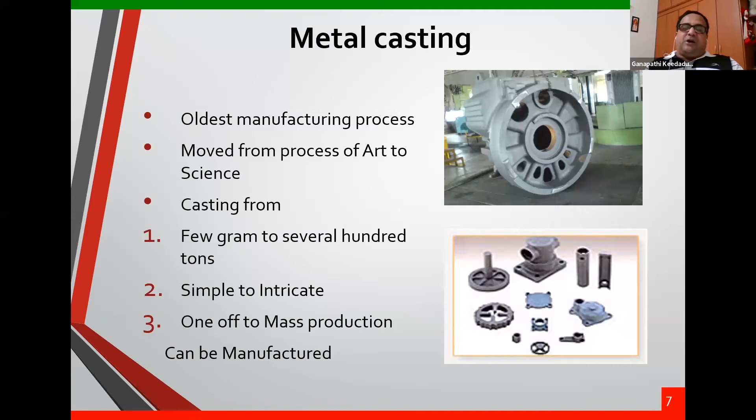If it is a too complex shape, I don't have an alternative. If it is one-off numbers, or mass production at the lowest possible cost, we don't have an option. Hence, people prefer to go to the metal casting processes. I have just demonstrated here; I have used some of the information in the articles.

Look at this. This is one of the front cradle structures. I hope you understand what a front cradle structure is in an automotive, where all our engines are kept in the vehicle. If you open the bonnet, all the engines and so many things are kept on some structure. The structure is called the front cradle structure.

In 1950, this front cradle structure was done with steel sheets. We can see the first figure here. It is a steel sheet construction. It had 46 parts and the weight was 28 kgs. This was in 1950. Come to 2010, people started using aluminium castings in many cases. That is 6 parts, with a 16 kg aluminium casting.

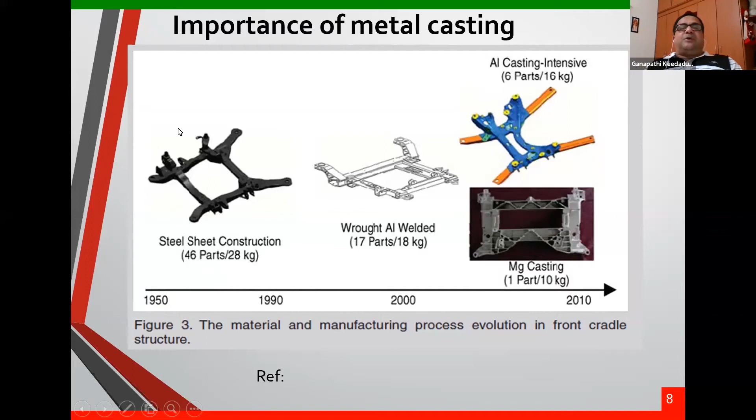Recently in a few car categories, they started using magnesium castings also, because of the density advantages. See that from metal forming, they moved to the casting process now.

Another one is the instrument panel. Inside the car, there are many instruments, and there is a panel to keep all those, the instrument panel beam. In 1950, it was welded steel sheets. Today, people are moving to the magnesium tubular casting. They are going to the casting route. These things show the importance of the metal casting process.

There is a new alloy because magnesium casting is easier. Hence, people are going for the casting process. Many advantages. Look at this. It was 30 parts in 1950. It has become 1 part. Part consolidation has taken place here. And the weight was 12 kg. Now it has become 4 kg. Weight reduction has taken place, and part consolidation has taken place. That's what the casting process has given today to the automotive industries.

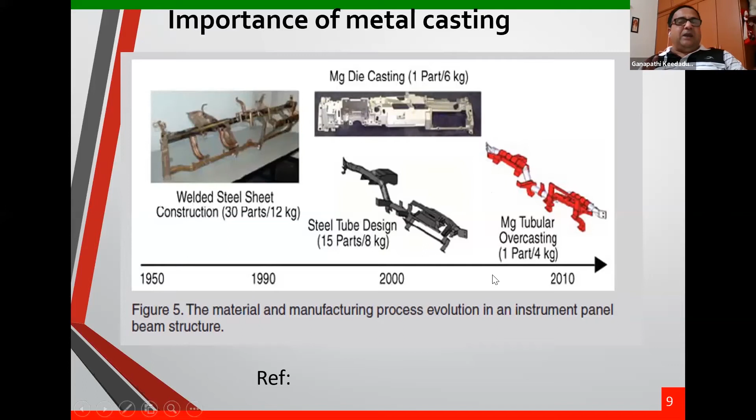Hence, it is very important to understand metal castings and what the future of metal castings is. With this brief introduction, I assume you know the basic metal casting process, so I'll quickly run through this process one by one. The first important one for the metal casting process is the pattern and the core box.

The pattern is always called the heart of a foundry, because how well the pattern is designed and manufactured determines the level of problems in the foundry. If the pattern is good and well designed, we'll have the least problems in the foundry. That means the problems faced in foundries are contributed to the maximum extent by how the pattern is designed and how it is manufactured.

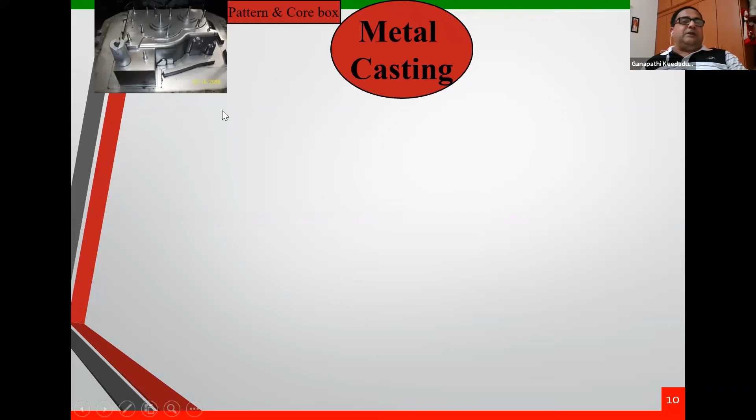Hence, it is very important to design the right pattern, correct patterns with the correct parting lines and all those things, and manufacture it too. The finish, the way of manufacturing, and all the other features we are giving play a very important role in the pattern. Hence, the pattern is one of the important things for the foundry.

The first thing is, if it is a sand casting, we require a pattern. A pattern can be 1-part, 2-part, 3-part or 4-part. In the maximum percentage, 2-part patterns are used. You can see here the pattern is fixed on the match plate. If mass production needs to be done, it is always better to fix it on a match plate, because you'll get consistency, since the two parts need to be assembled.

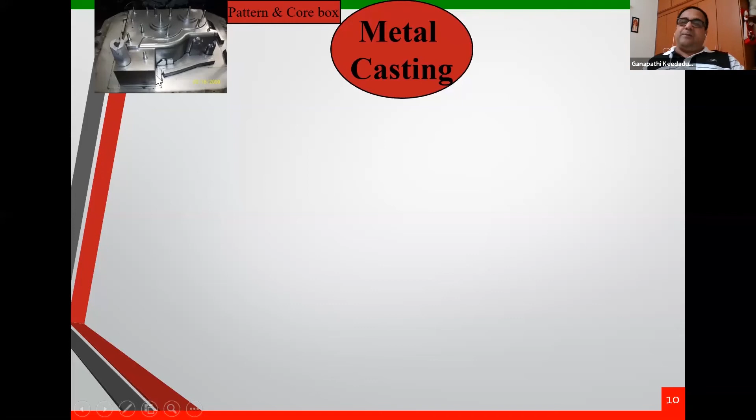If it is a loose piece, assembly may become a problem, and mold-to-mold assembly can become a problem. All those things can be completely avoided by fixing it on a match plate. In any mass production, automated foundry, patterns will always be fixed on the match plate with all the gating and risering system. That comes directly to the mold making shop. Let us go into the details, one or two slides about the pattern and the core box.

In a sand casting process, another important one is the sand mixing operation. When I say sand mixing, we know that we use silica sand. Directly, I can't use the silica sand to make the molds because it has to bind. Strength should be there in the mold, or it should become hard. It should retain the shape when you form a mold.

Hence, we need to mix the sand with the binders, right? That mixing is very, very important. Sand and binders need to be mixed before that sand comes to the mold making process. Today, we know that these are seen in foundries. In a laboratory or small scale foundries, people use the muller to do that.

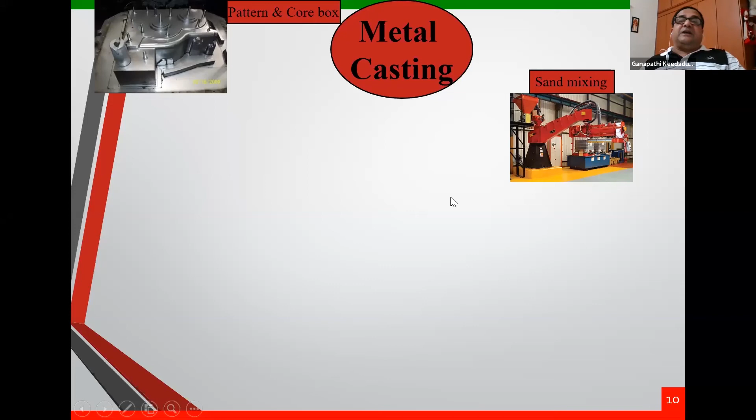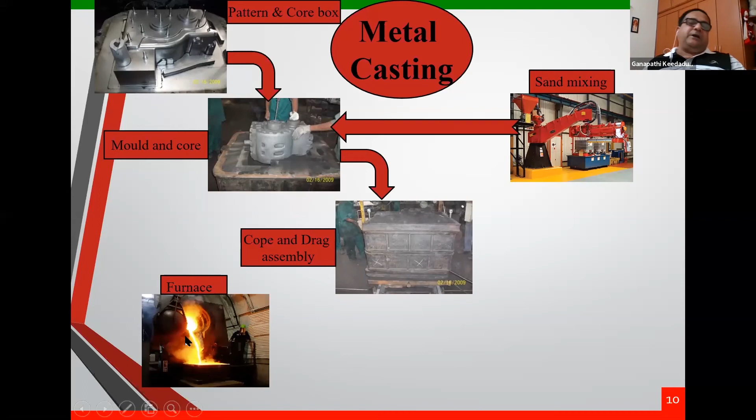What is the next process? The melting. We need to melt the metal in the furnaces. Generally, induction furnaces are used in foundries today. Electrical induction furnaces are used because of a lot of advantages. The metal is melted, taken in the ladle and poured into the molds. This is the general process of any foundry. If it is a sand casting, it goes exactly like this.

If it is a die casting, a pattern is not required because the molds are already made in the die. Only keep the core inside the mold, assemble the two halves of the die and pour it. That means these two halves, which we prepared now in sand, are already available in metal. Keep the core inside, assemble the mold, melt the liquid metal and pour it. This sand mixing and pattern business is not there in die casting processes. That's all the difference. We'll go into those processes in detail.

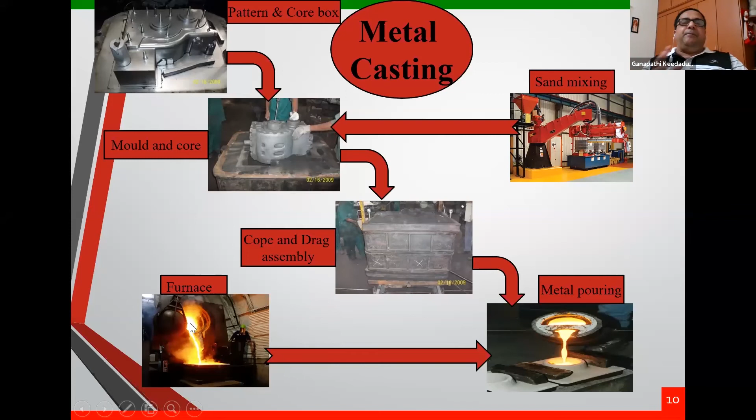But in general, what is required is you have to make the mold, make the core separately, assemble it, then melt the metal in the furnace and pour the liquid metal into the mold. So why metal castings? They can create complex part geometry. If you want it too complex, you have no other option than the metal casting route. It can create external, internal, any complex shapes.

Few castings are net shape, few are near net shape. What do you mean by net shape? Net shape is when the casting I produce directly goes to the next assembly. Such things are called net shape. Near net shape means with one or two small operations, it will go to the assembly. Such castings are also produced in foundries today. Few net shape castings are produced, in investment casting and die casting. Many near net shape castings are also produced. It can produce very large parts.

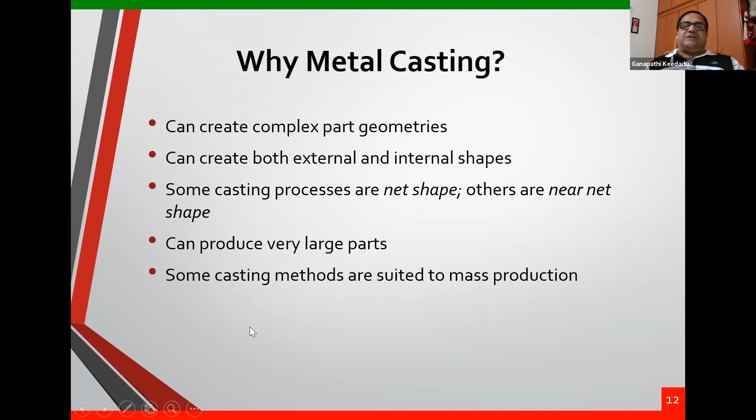The thumb rule is, if it is more than 500 kg, we have no other option. We have to go to the metal casting route. Some casting methods are suited for mass production. If you want mass production also, we can do it in a foundry. Yes, these are all the advantages.

Then what are the problems with the foundries today? Limitations on mechanical properties. All of us know we cannot get the strength. Let us take an example, what is called the connecting rod. Connecting rod today is produced by the casting route, by the forging route, and also by what is called the powder metallurgy route. If you produce with the same chemical composition, same alloy, by all three routes, definitely forging will have a better strength than the casting.

Look at this. Chemical composition is the same, let us say almost the same. Casting also has medium carbon steel. Forging also uses a medium carbon steel. With the same chemical composition, generally casting will have lesser mechanical properties like strength, but forging will have better properties. That is one of the disadvantages of the casting. This has something to do with the microstructure.

If I use a casting route, I will get a coarse grain structure. But in forging, I will get a finer grain structure. Always you should know this is one of the rules of metallurgy: finer the grain, better the strength of the component. This is one of the ways of hardening, strengthening the materials. Since we have finer grain structures in forging, we will have much better properties than casting. Hence, casting by its nature has limitations on the mechanical properties.

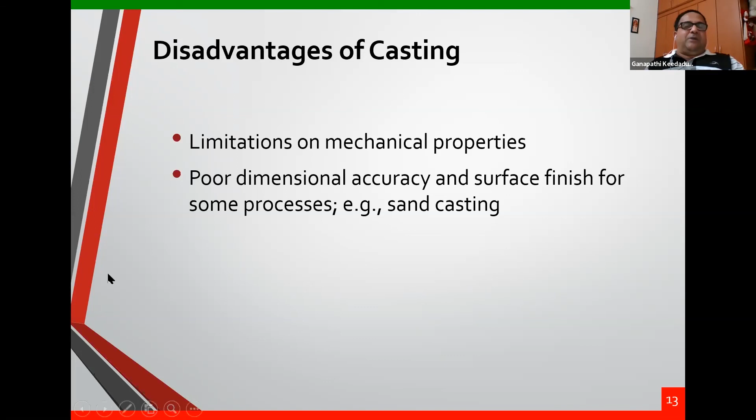Another one is safety hazards for the workers due to hot molten metal. People who are working in a foundry will be handling hot metal. There are a lot of safety issues. A lot of care is taken today in foundries to avoid all those things. With all that, it is not a white collar job. We have to work with molten metal, with sand, with chemicals called binders. You may be handling heavy weights.

All these are safety issues, and the ambience may not be as good as what we have sitting in front of the computer. You may not get that in the foundry, and there will be dust and all those things. These are the safety hazards of a foundry. Environmental problems, yes, there will be some environmental issues also. In the olden days, maybe 30 years back, this problem was much higher.

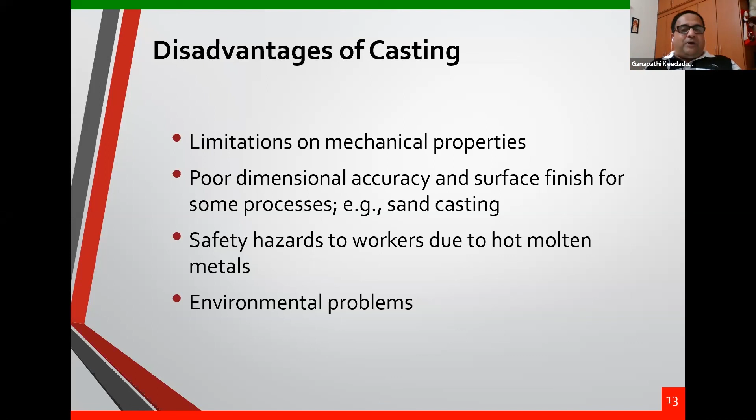Today, in modern foundries, things are slowly changing. People started using robots in foundries, and fully automated foundries are there. People may not need to go into all the spots in the operations of foundries today. A lot of improvements have taken place to reduce safety hazards, to take care of environmental issues, to improve the accuracy of the casting, and to bring quality consistency in the foundry. So many automations have come into the foundry today.